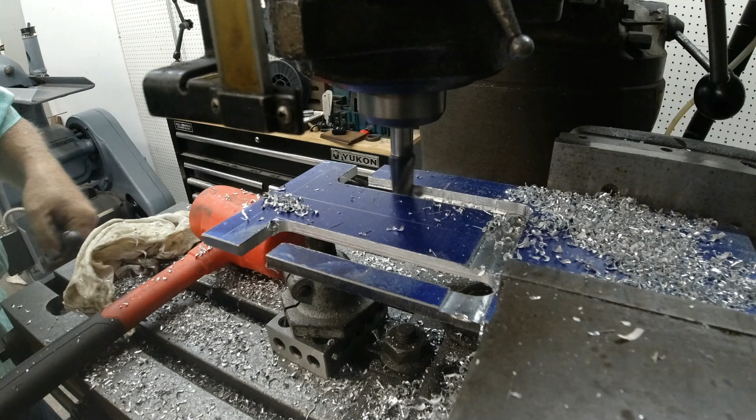Hi folks, today we're not in my shop, but we're in Don's shop. Don will be in a little while, he's doing something, didn't really want to know what he's doing, but he'll be by. Anyway, the reason I'm over here is because, as you know, we're rebuilding my Bridgeport, and I'm over here borrowing his Bridgeport, and getting to say hello to my baby over there.

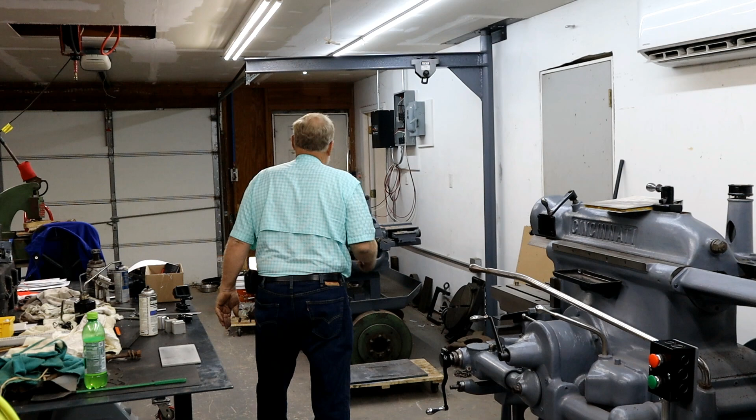Cincinnati's almost finished. Got to make the gibs for the head, and that's the last part. But everybody's been busy. Hi, baby.

He hasn't been waxing you, has he? Best slave I ever owned. Uh-oh, trouble has arrived.

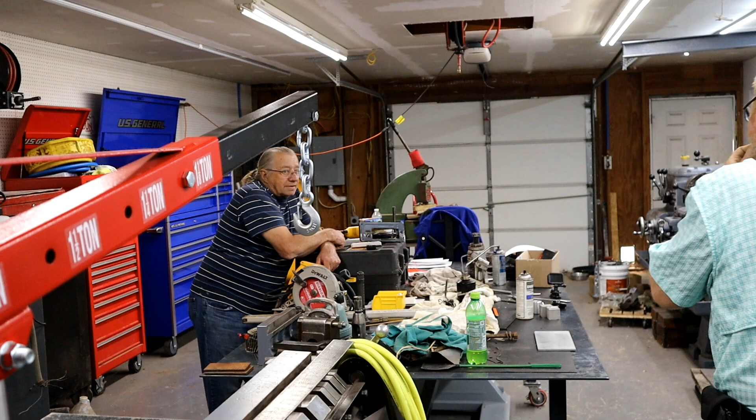You've been here. Hi, you're hiding. Don't hide. I'm not hiding, I'm working. Why are you working, huh? They pay me to work. Turn it down for you. Now they can hear you, they can't see you. They've been wondering where you are. I'm still here, he's hiding. All you ever do is work anymore. Hey, story of my life, it's what they pay me to do. Kind of feel obligated to do it, you know.

I noticed you haven't waxed baby in a long time. No, why haven't you waxed baby? I haven't done anything in a long time. I'm going to have to call the lathe police on you. Except build a wall, that damn near killed you. It did, I'm getting old. Well, we'll have to get you back in the swing of things. I don't think you understand what getting old means yet. You go from 'I'm feeling okay, pretty good for my age' to 'oh shit, man, I'm starting to feel old.' And it happens pretty quick.

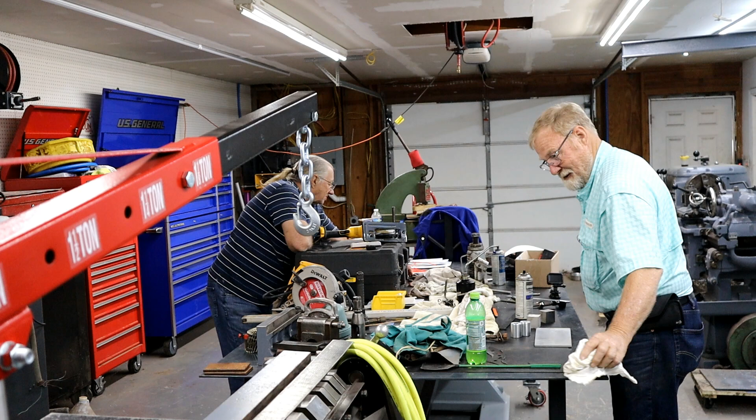It really does. I think you should borrow my membership card to the gym. I don't think that's what it is. Of course, I haven't used it in about a year and a half, so somebody needs to go use it. I mean, I'm pushing 73, I'm starting to get old, okay? You know, I know people in their 60s who can't walk. I know you were going to tell me, but it just depends. Everybody's different, I guess.

Well, I came to play with your tools today. Well, if you'd finish your mill, you wouldn't have to. I'm trying, I have to work too, you know. Well, not really, I don't have to, but I like to. Bullshit, mama makes you work. Mama does make... she says get out of here, so I have to go find something to do. Don't pay for your toys. Yep.

Well, I think I found everything. Where could I find a small machinist square? I mean, I know you think this is a small machinist square, but it's not. A larger one? Six inch? I don't have a six-inch one, got one that big. Okay, that's the biggest one I got. I'll take it. I thought you maybe have... I thought I had one bigger, but I don't know. What's that? You didn't wax this one either, you got to wax this thing. Okay, now that's better. He's over here looking in his stash.

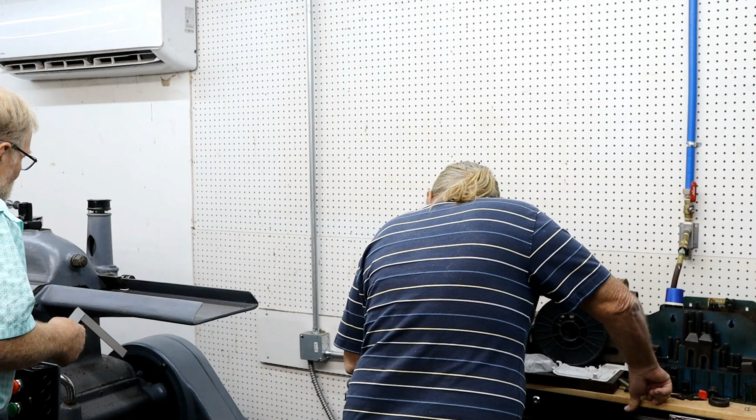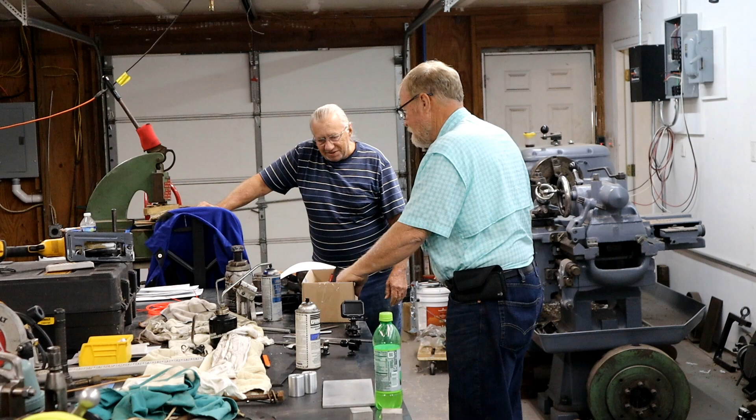All right. Well, I got to make some things, got to lay it out and take care of all of this goodies. Well, this is heck, I get you a microphone and then you walk around. Well, I've got to go back in the house because I'm still working. We'll just keep on to say hello to everybody. Now he's leaving. I got stuff I gotta go do, you know. Goodbye, I'll be back. I'll be here, we gotta finish this soon.

I need the gib from the shaper so I can finish putting that together. Well, the gib from the shaper's coming quick. You'll notice it's all back together now except the front end. Okay, well, we'll get it. Yeah, we'll get it sooner or later, no rush. Don't see why you need a shaper in the first place. Can't do anything eight foot long.

Okay, I'll bring you a little closer and show you what I'm doing. Shake you up real good.

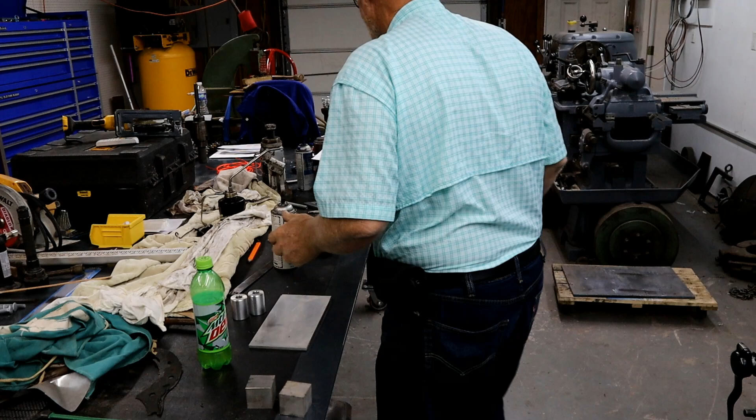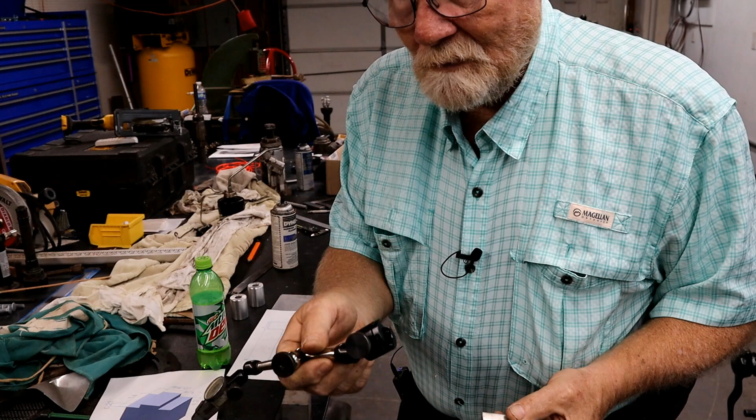Got two things to do today. One is to finish making this part, which is what I showed you in the last video, making this on Bob. Then I've got to make this part, which is going to be roughed out of these pieces of aluminum block, and will transform into the base for this little Noga style indicator holder that can be on the Kingway. So that's what I'm doing.

Also need to take and make this upper plate for the round part, and might as well make it here while I'm here.

That way I get to use his electricity and air conditioning. Don't tell him, don't you dare tell him. He'll charge me, he'll put a coin-operated box on there.

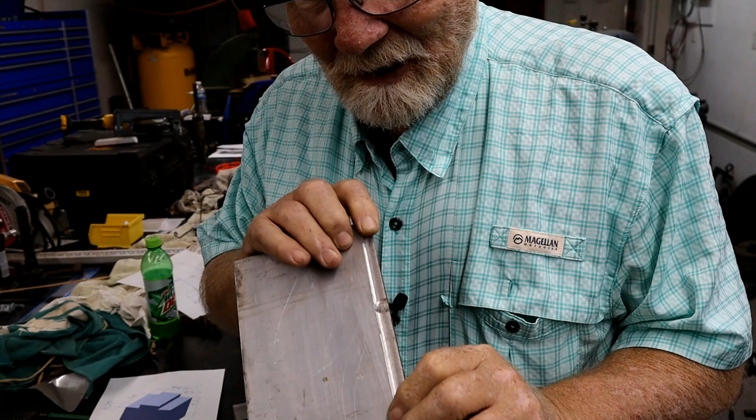I went and dug through my aluminum scrap pile, and even though this one's been cut on before, I've got just enough from this side to this side to make the width of this T-plate. It's 4.38, and I think that's right at 4.5. This is a 90-degree angle. That looks good on that side, and that looks good on this side.

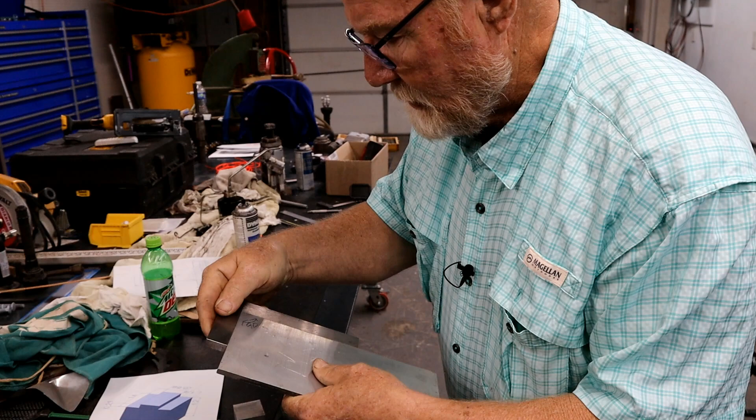But sometimes making sure the program works and all that takes longer than just putting it on a manual mill and getting after it. This is so simple. So we're going to square these up real quick, and then I'll lay them out using the old school method. And that's what I'm going to do with this plate right here. It's a simple plate, I just need to take care of it quickly. And in the old school days, we did this with a scribe and layout, and that's what I'm going to do.

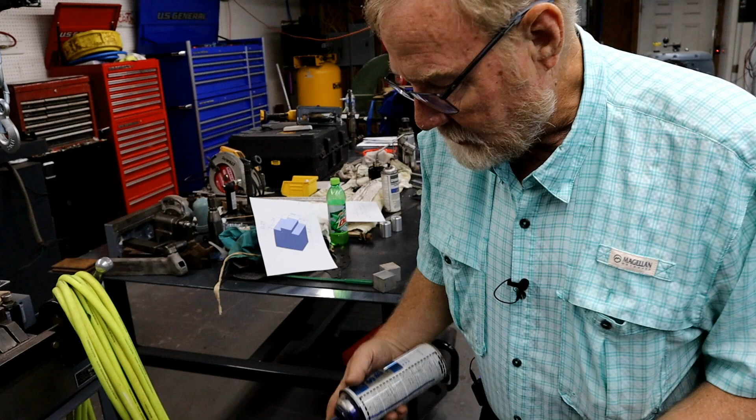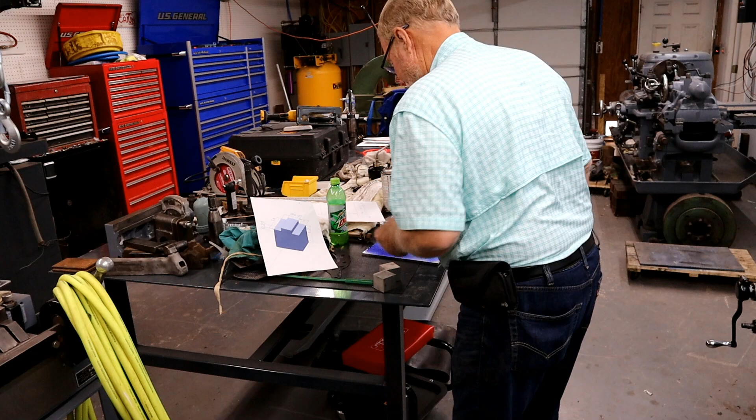This is blue layout ink. You don't have to have it, but it makes your lines stand out a lot better. And it makes your fingers blue too. And it dries very, very quickly. This can is so old it's not spraying very good, but it's just one I grabbed.

I'm going to take this and lay it out on the surface plate with a scribe. But first off, I got some rough edges on it that I need to take care of. So I'm going to borrow this little grinder over there. Well, it's a belt sander. Grind this off real quick.

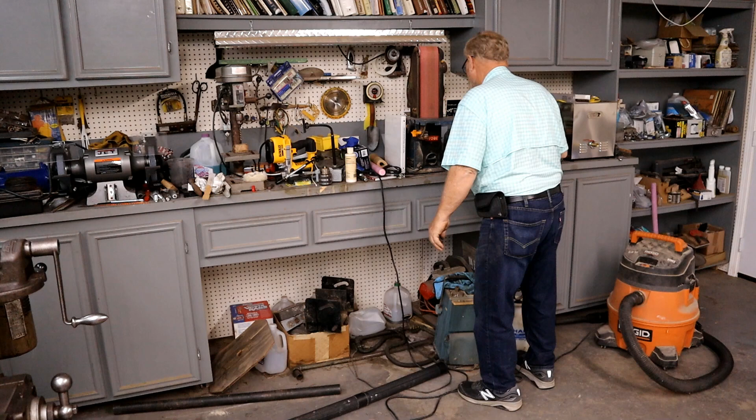Be damned, he put a coin operated- no, he didn't. I don't know how it worked.

Got my fingerprints on it. I just knocked these edges down to where they're not really rough. We'll use them as we lay it out. Let's go in there.

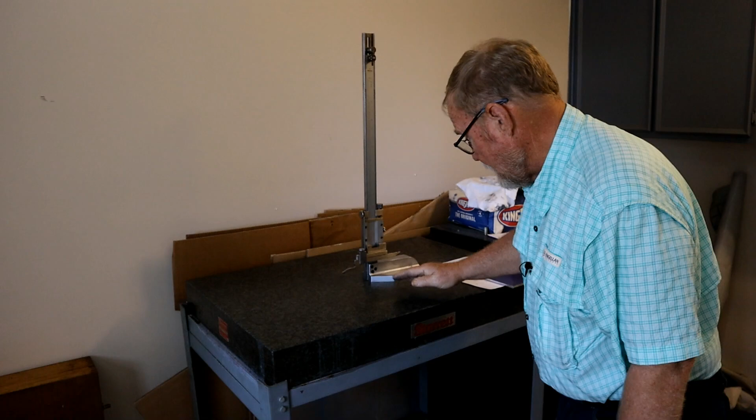Now I'm in a room in Don's shop that's kind of dark, and I didn't bring any accessory lighting today, so hopefully you can see this well enough. This is Don's granite surface table. It's a Starrett brand that he got, and I don't think we've ever had it tested, but for what I'm doing, it's plenty good.

Wipe it off with your hands so you make sure there's no grit on it before you start moving things around on it. Same way with your piece of material, wipe it all off. You can have these things resurfaced and checked. All the ones in my shop have been checked out and are certified again. This one we haven't ever had done, but it's a good plate on a good quality stand, so it should be good enough for most things. Just keep it that way by keeping your hands and everything clean.

Now, this height gauge is the way I used to do everything. It slides around on the granite surface plate, has a graduated scale that lets me easily measure things, and this has got a carbide scribe on the end of it so that I can make layout lines. And basically, this is what we're going to lay out right now.

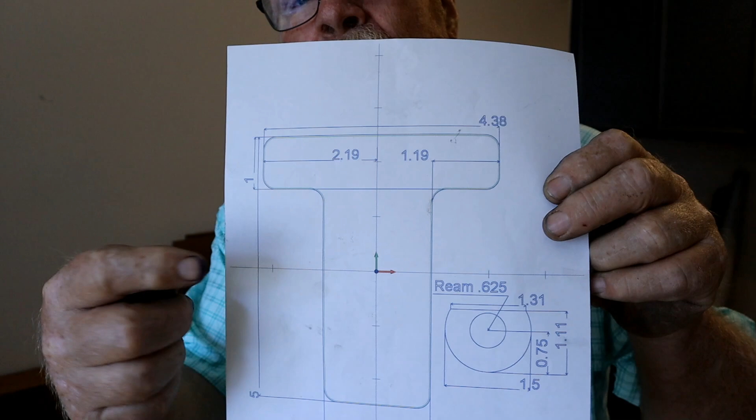This is not to scale, but I've got the dimensions on it. When I get back to the shop and I need to start laying out the holes for drilling it, I'll print out one that's 1-to-1 scale, and then that way I can just punch those holes and make it quick and easy. This is the plate that the leveling vials are going to attach to.

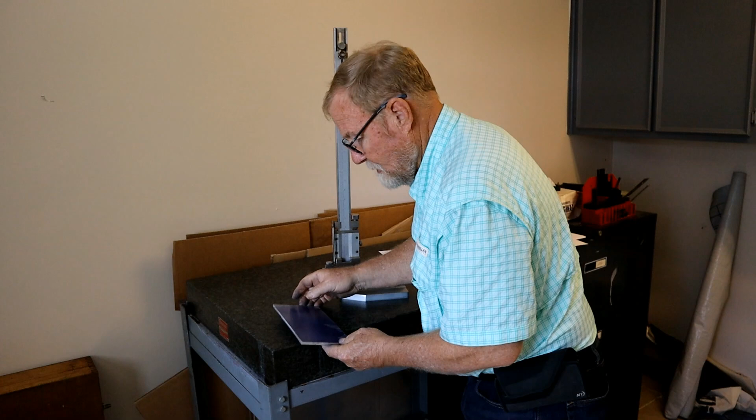Anyway, I measured it out and checked this corner on the square, and it's at 90 degrees. Unfortunately, I should have checked this side, because this side's got where it's been milled before. So let me go check this out and see if this is square.

Now I brought back some of the basic tools from the other part of the shop. If you don't have one of these, you can still do the layout lines. You just need like a carbide scribe. You can buy these at almost any hardware store, the little general tool section, they make these. Square, let's check this.

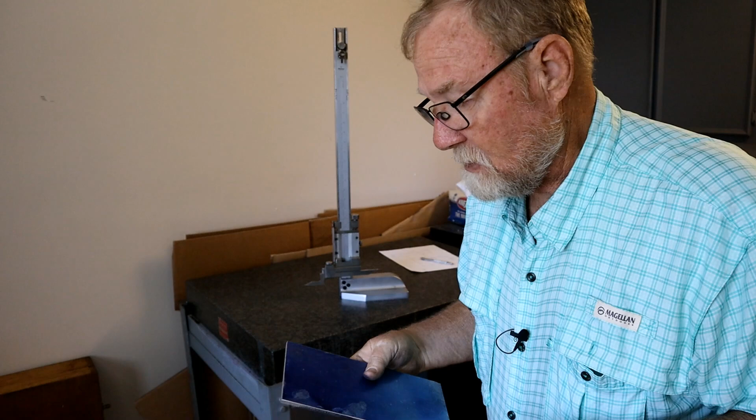Luckily, that side is perfectly square also, and that's not the side that's messed up, so I can use this side for my first reference point. Now, if it wasn't square, I could lay it out with this, cut it, and then go from there. But I'm already starting with two square edges.

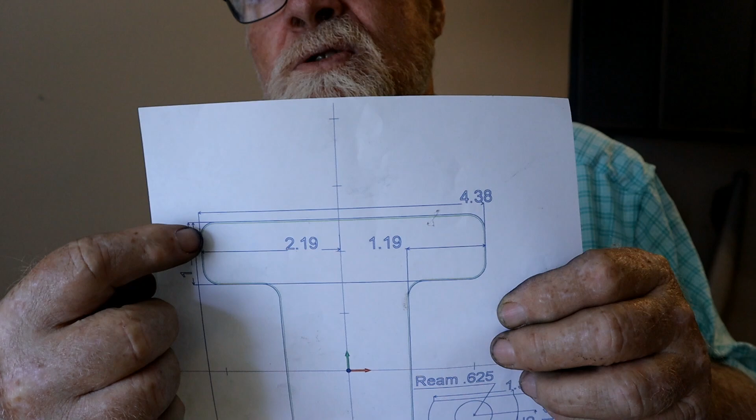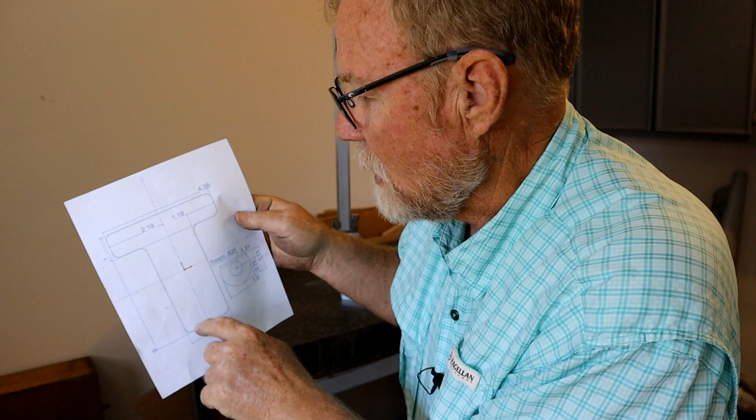Now, the one I have at home has a little magnifying glass that'll slip around and you can read it a lot easier, so I might have a problem with this one.

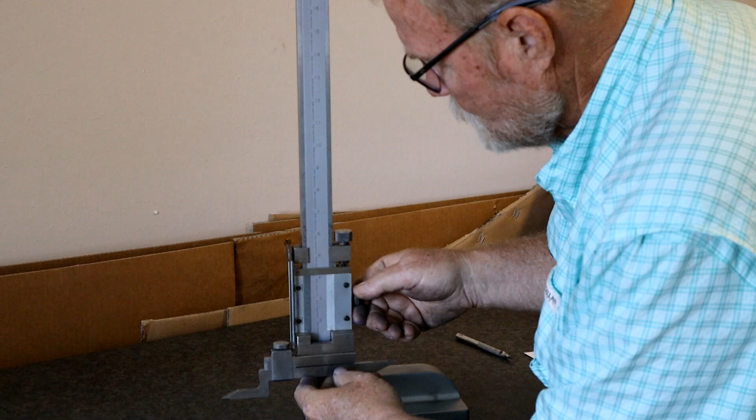First thing I'm going to do is loosen up this top. This is the fine adjustment. This one here locks the main body. Now this one locks the main body, and this one locks the fine adjustment portion of the machine. I can lock that there and unlock this, then use this knob to dial it in precisely.

First thing I'm going to do, since I've never used this, is check to make sure all this is tight. Then I'm going to lower this down onto the surface plate. I want to make sure that it's touching right there, which it is. And now I can use this part of the scale to raise it up and down to get it perfectly on zero.

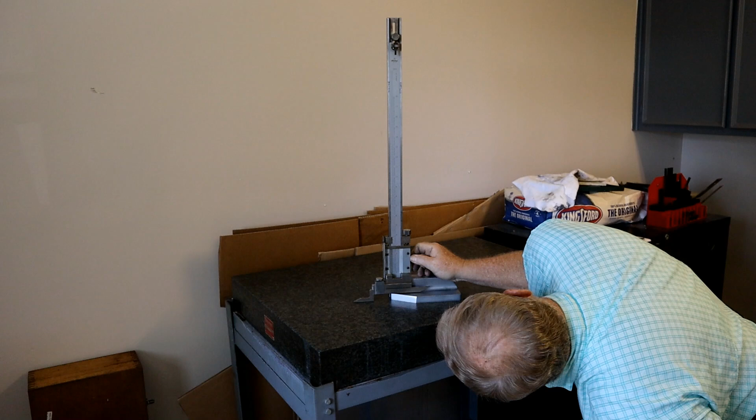I'm zeroing my height gauge. If I look down here, it is already perfectly zero. So great — now all I have to do is move it to the measurements I want to draw a scribe line on. Let's start with the first one.

We're going to go up to 5 inches. Now, I could sit and lock that right there and then use this scale to bring it up to exactly 5 inches.

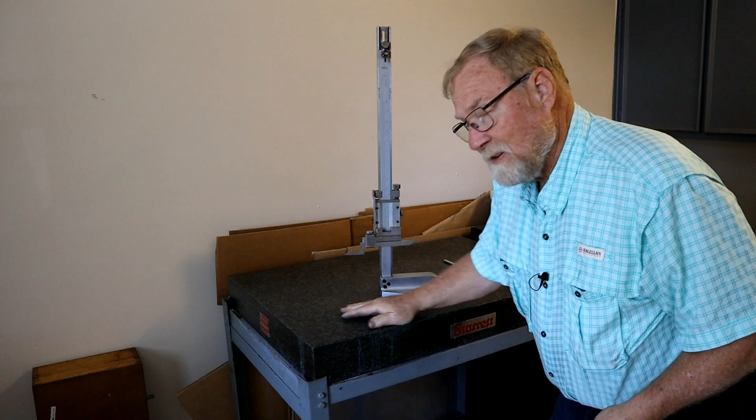And there we go. I don't think you guys could see that. I'm wearing my newfangled glasses and I can barely see it. These are some kind of progressive type lens. Haven't ever had to wear glasses for distance in my life. In the last 3 weeks I started, and it's a different way of living, I tell you that.

Your hand can feel so many things on there that's different. Okay, I know this is my 90-degree angle. I want to put it here, and then I just set my scribe like that and pull it across. I now have a scribe line at 5 inches.

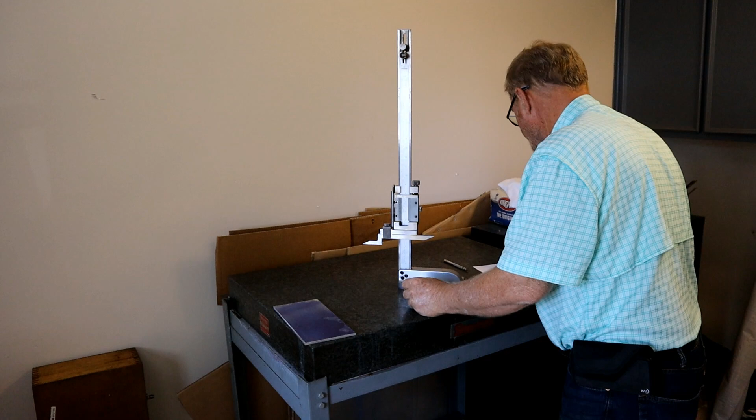I need one to be 4.38. I might just change that because 4.38 is kind of silly to have to measure out, so what I'm going to do is just go on up here to 4.4. Got it on 4 inches. There we go, got that locked in.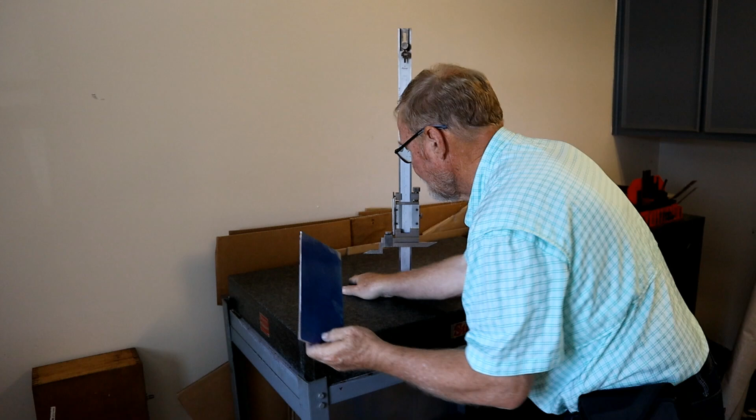This is my good surface here, this is the milled surface, so I want to cut all that off of this piece of scrap. So now I've got a 4.4 inch line — I made it 4.4 for now. I can mark a center line on this for lining up the screw holes by just going to 2.2, okay? 2.2, took all the math out of it.

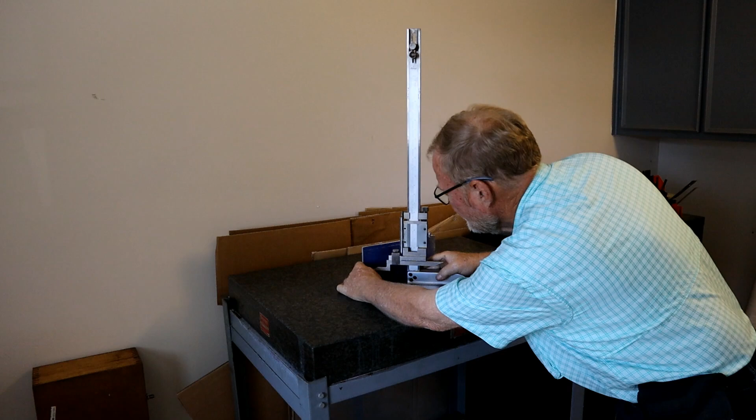So now I've got a center line, I've got a bottom cut line, I've got a top cut line, and I've got a piece that's 4.4 wide — halfway done.

So now we're going to work on the length measurement for this part right here. It is 1 inch exactly. So if I come up to 1/2 inch, I will have a center line for that piece, and then go to 1 inch, I'll have the bottom cut line. So let's go down here to, well, let's just do 1 inch while I'm there. That is 1 inch.

Now I need to go to 1/2 inch for the center line. I didn't make that 1 inch line all the way across because I've got other lines coming in intersecting it here, so I just stopped it a little bit early. This 1/2 inch one I'm going to go almost all the way with because that's going to be lining up my screws.

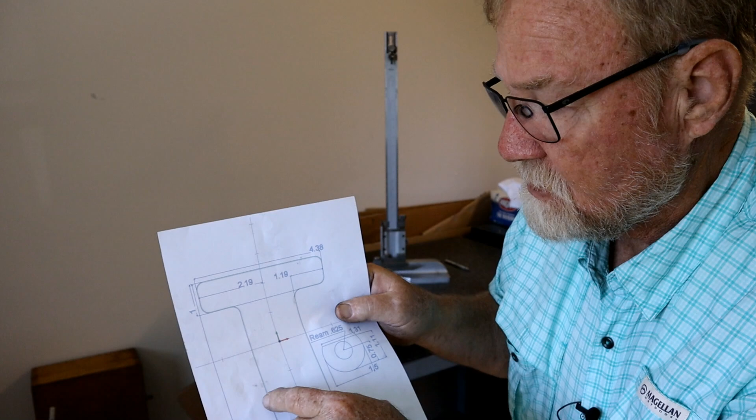We've got this top part lined out, so now I just need to do these 3 lines and I'll be finished. Now, this is 2 inches wide, this is 4.4 wide.

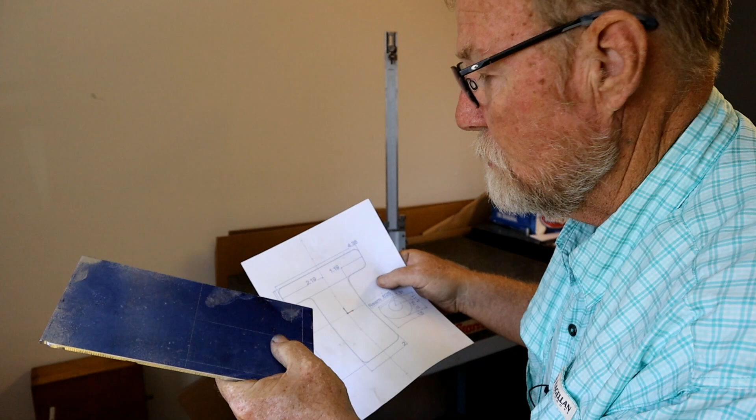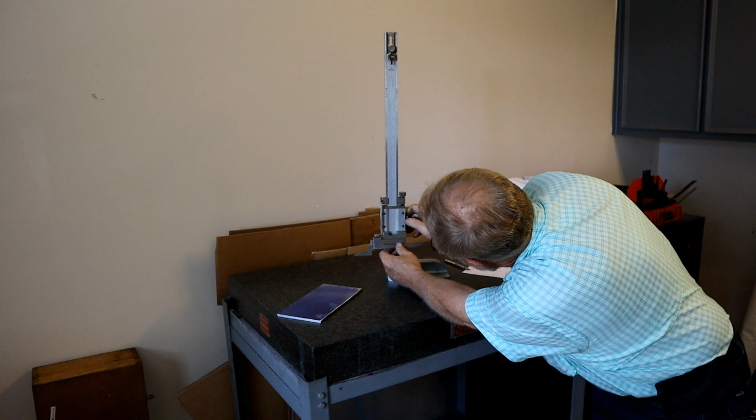I need to have a center line, which I've already got here, at 2.2, so I just need to add 1 inch above and below that line and I'm through. So 2.2 would be 3.2, which is there.

Start about right here, go all the way down. And then 1.2 would be the bottom one.

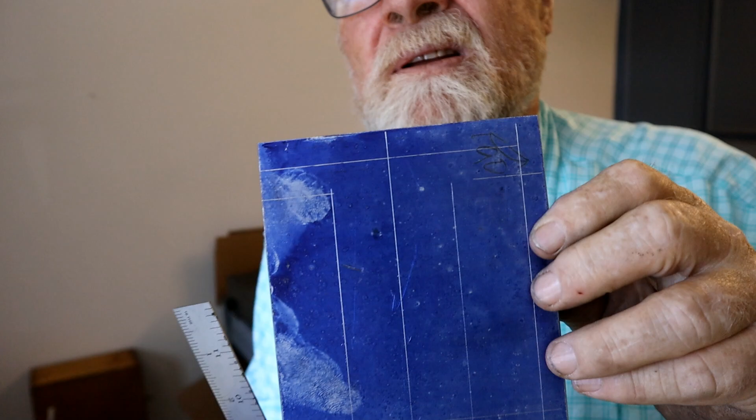So now I've got the top 3 parts and the bottom parts, and now I just need to verify my measurements. That's 2 inches wide. 1 inch wide, 1/2 inch on that center line, and this is 1 inch in the center. So we're done. Wasn't hard, was it?

Don's back. Tiny hinge pieces? Those little hinge pieces? I did. I'll show them in a minute. Just want to make sure you...

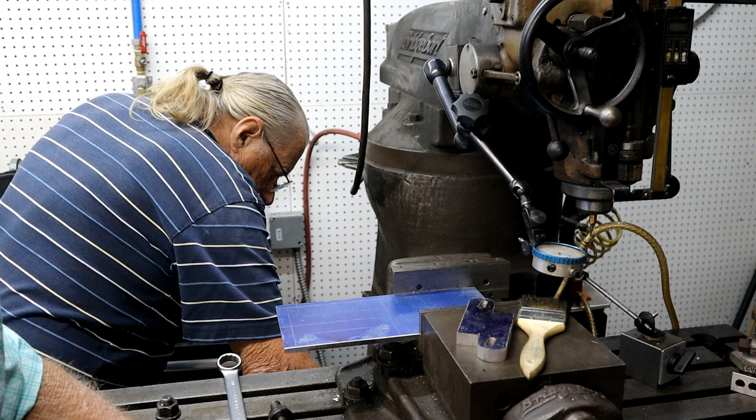Now, Don doesn't remember if this vise was set up to be exactly... It was at one time. It was at one time. That's the... we don't remember part of it. It's because you're getting old, remember? Yeah.

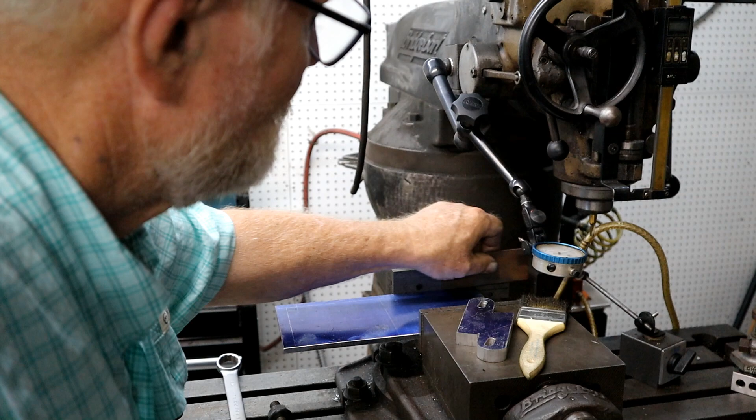And Don is still on a spending spree getting all kinds of tools for his shop. Oh no, you are too. I haven't bought anything in a long time. Every time I come over, you have to see something I've done and you want that too. I haven't bought anything in 6 months. Why? Don't need anything, that you know of.

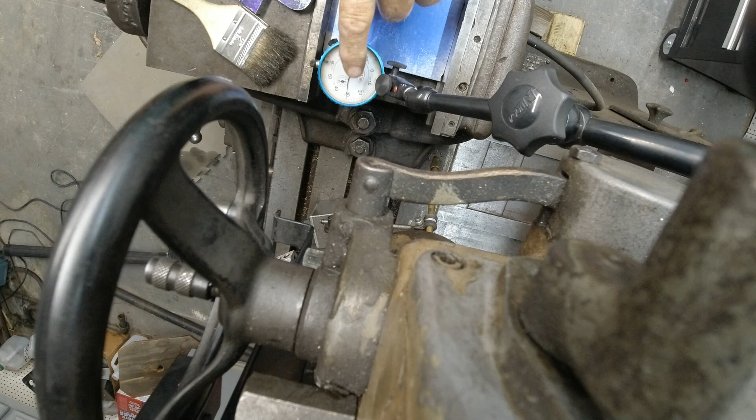So this is Don's indicator. I don't know, see my finger? How do you like Don's needle? Accelerated too fast, Don is so fast.

Why is this hard to move? Because it's worn out. It's worn out, and the gib is probably too tight? Too tight on one end and too loose on the other end.

Well, is it moving? Yeah, a lot. 2 thou. Every time I crank the handle, it's bouncing. Hold on, stop. I wonder why, you got a thou right there. Huh? There, half a thou? About here on the end, I got 10 thou.

We got to get this on the gauge, or we got to put this on something. I tell you what, it works better over here. I think it's fairly close, though. Well, fairly close. I'm going to square something off on, and right now it's gained 3 thou. 3 thou, 4 thou, huh, in 3 inches. So I'd say no.

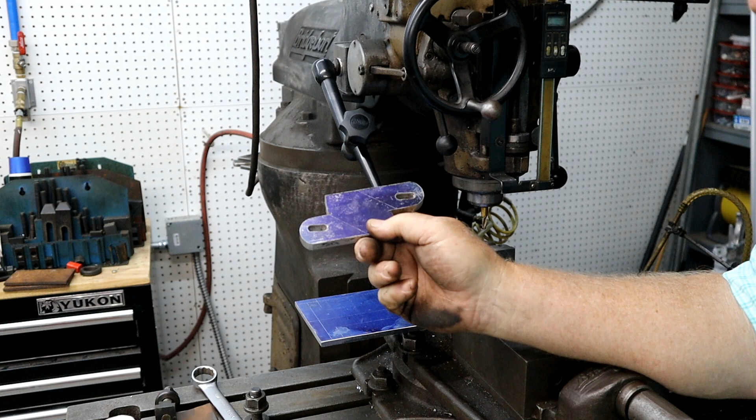There's a video I'll link to where it showed an utter fail of me trying to TIG weld that ladder bracket. So Don brought it over here, and we're making a new one.

And he put it on his vise. It needs to be cleaned up. Well, all, but it's really good for somebody that's never run mills before. I just eyeballed it. You eyeballed it. The angle. I matched the angle with the one you gave, the old piece.

Okay, well, see, that works fine. Was that the right size? And we left it in one piece so it's easy to work with and get these round corners on. So, is that the right size? Yes, this will work, sir.

Anyway, that's pretty good. We'll clean that up, and then I'll try to weld it again and see how bad I do. All right, we got it moved down a little bit to where it's in a freer range of travel.

Which probably means it wobbles more there. Let's see what we got. Now, see, it's pretty smooth right in here. It's loose enough to be smooth.

And actually, that's pretty close. Would you like to borrow my new glasses, Don? From here to here, though, it's pretty good. So we want to split the difference because it didn't move from here to here, and it started moving from there to there.

Okay, right here is at 38 thou on this dial. This is where we're watching, Don. I've taken and stoned that surface. 38.

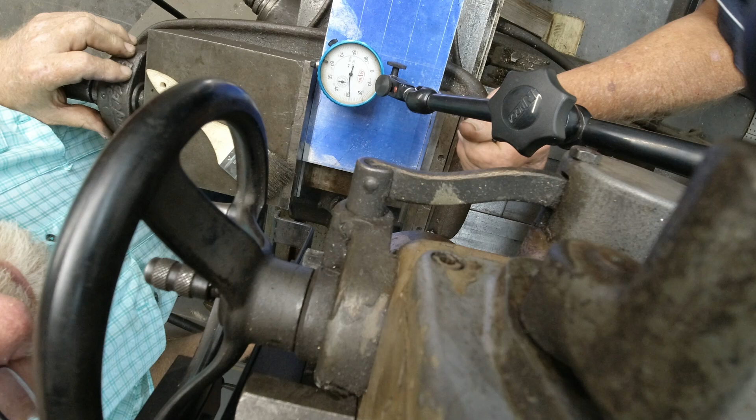That's pretty bad. 10 thou, 11 thou, 10 thou - it's 10 thou. That's pretty bad. So what should we do?

Split the difference with the vise, move it. And how much will that be? 5 thou. Very good, my God. My goodness, half of 10 is 5. That's - I'm a genius. No, you just went to school when we did. It made you use... you didn't have critical thinking. You didn't have to have a calculator to figure that one out.

Now I need a hammer. Tappy tap, I'll give it. I need a tappy tap. That's a bad hammer, no. You want the dead blow? I want a dead blow.

I'm trying to make this bounce all the way around. I grabbed the plunger here and pushed it in to see which way it needs to go. If I kick it this way, it'll make that plunger go farther in and high. Well, we don't want that, we want it to go the other way. So if I rotate it this way, it will make it.

You want to go 5, make it go 5 thou? I want to go - very good. Right there, that's good enough for right now. Try it now. Okay, just gonna try it. Lock it down.

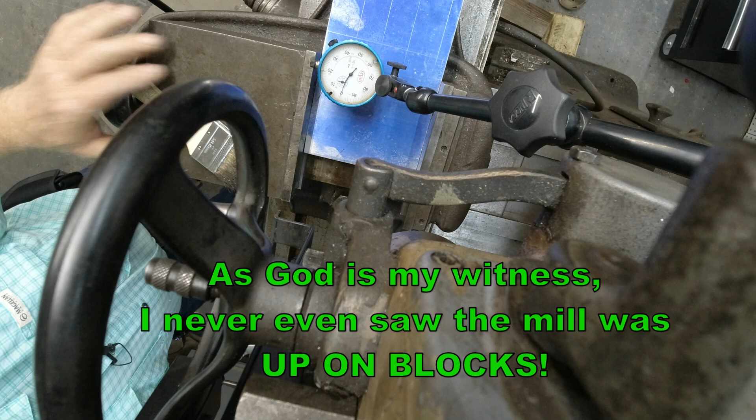Well, that could be attributed to the table. No, that's pretty good right there. Almost dead nuts on, except for that little spot right there on the deal. Why is it way at the end? Listen. It's not, doesn't move right there at all.

Considering that old beat up vise, it's probably about as good as you can get. It goes, drops off right at the end. This might be bad, this might be low, worn. I mean, it's good from here to here, and then it drops off right there.

Well, but you got to think here now - this is being told where to go by the lead screw, the nut, and the slop in the rails. Well, it could be a bad spot in the table, a worn spot. So if it gets into the - which really makes sense, because when you get there, where are you at? In the middle. Where do you use most of the back and forth? In the middle. So that's where it would be worn, so that makes sense. You're right.

Good God, I'm glad this doesn't have to be precision, because we ain't going to do it on that mill. The thing wore out. I know it's wore out.

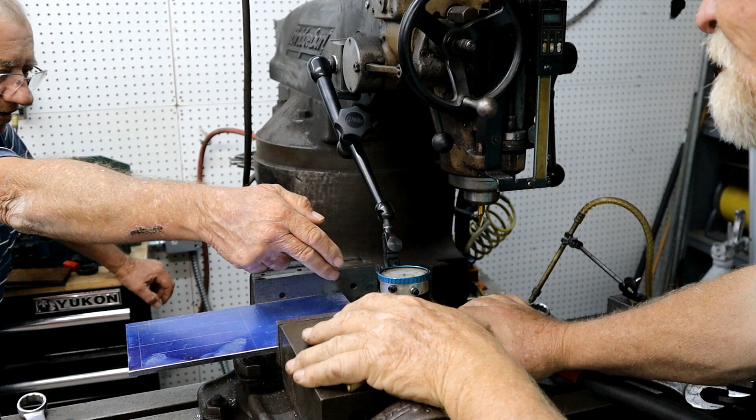Even I know that. Well, I'm going to try to get it as good as I can, and we're not going to worry about it. Well, you're doing it on this end anyway, and that's the end that's pretty good. So I think we're gonna be all right. Well, I might not be able to do it that way, because it gets so tight when I get out there.

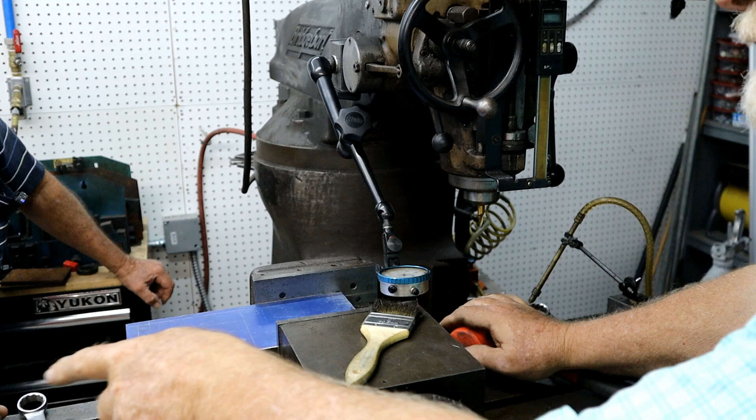What we were going to do was hang this over the edge and put a jack underneath it. And now we're going to go back. See if we go that way.

Let me see how tight it gets. It's still pretty loose here. Oh, it's real loose here, buddy. It's real loose. You have no problem here. Okay. No, but I got to get it all the way to here.

I know. We're still going. We're cutting. We're cutting. It's getting tighter. We're cutting, and that's all I have to go. Well, no, I have to go a little bit more. The power feed works okay. The power feed works okay.

Yeah, well, you can always move this a little more, right? I don't really honestly think it's going to matter that much. But if you move it further that way, it's just going to be worse. I think you can cut it. How you just cutting? That's not precision anyway.

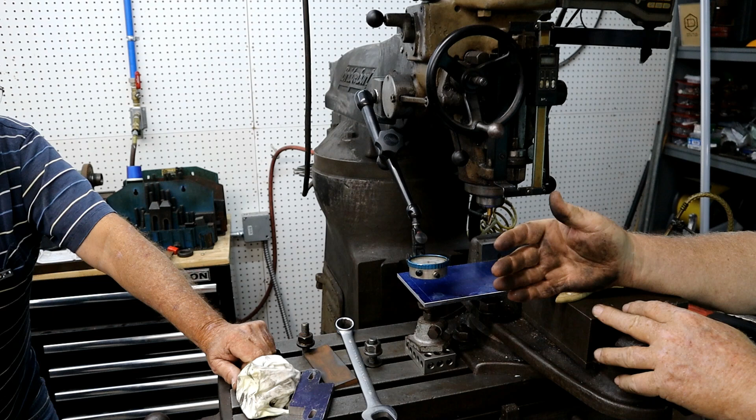It's just a T. Well, there's another way we could do this. You know, I've been working with old machines my whole life. Turn the vise this way. Go back and forth. No.

But the bed's worn, probably going this way as you're going, so that would affect the accuracy of this cut. But it's probably not going to change so much drastically if you flip this onto its edge. So if I were to take and cut that out with a saw, flip this on this side, I could then mill with the bottom of the cutter and get a nice finish there.

Now, what are you talking about, a couple of thou? That's just a bracket that doesn't go in anything. I know, I'm not worried about that. It was the next blocks I'm going to square up. Oh, okay, this couple thou doesn't matter. And we just leave it like that and cut it. It's the other ones that we need to worry about, which the way this video is going, it'll probably be next month before we get to it.

I would cut this out as is. I'd say it's good. Roll it and go, because it's just a bracket that doesn't matter anyway. And in a couple of thou, you can't even see that with your eye. Probably not.

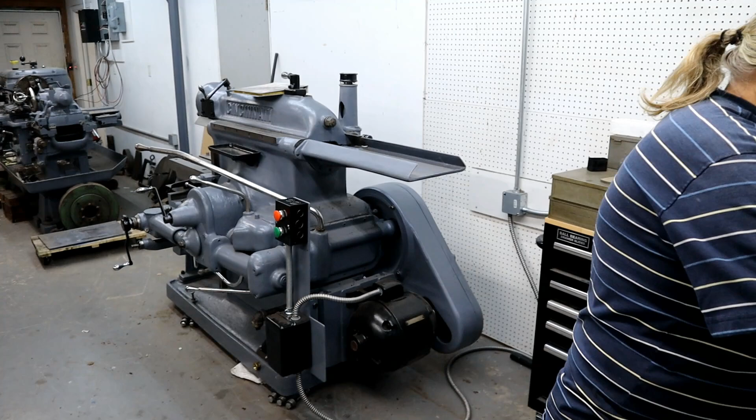We're going to think about this for a while. Let's talk about if you support this, it should be okay, huh? Can't go nowhere that way, and you're only kind of worried about going that way. And if you put this up there, you can't go that way.

I don't see nothing wrong with that. Just take light cuts, and you'll be all right. Yeah, I would think. Of course, what do I know? But I would think. I don't know if this works.

Go up enough. Yeah, it does. I'd say that's pretty firm enough to go this way with it, you know? You're not pressing down, you're just going this way and that way, right? As long as it doesn't loosen up here, that's what's keeping it this way. I would think that's okay.

We can give it a shot. Yeah, we can make this a what-not-to-do video. Okay, yeah, you can always get another piece of aluminum, worst case. But I think it's okay. We can be fine for that. Okay, let's get set up.

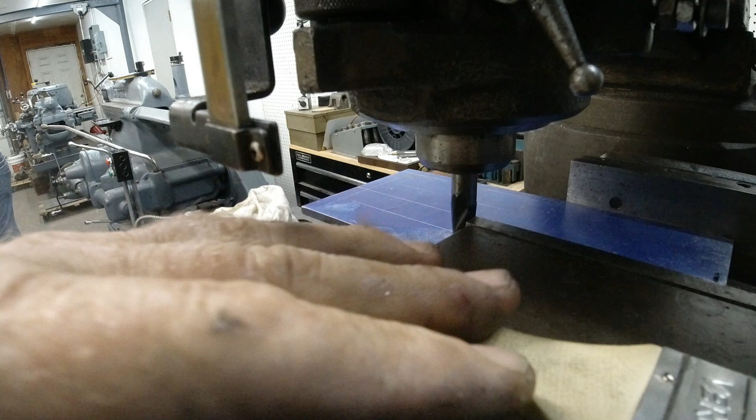Well, that ought to be a picture and a half. Clear everything off. See if it's reasonably flat.

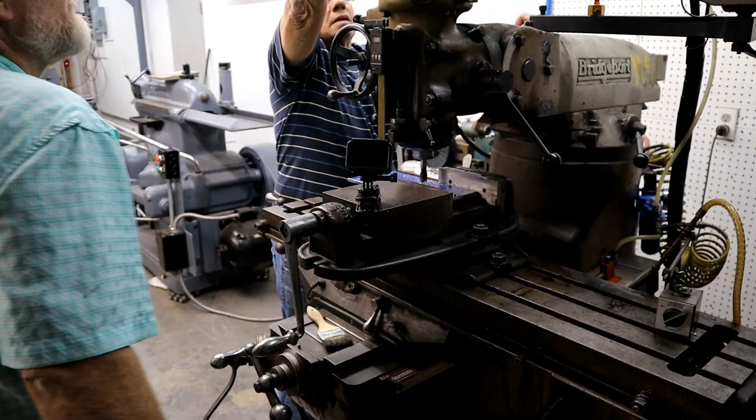So what speed is that belt on? Do you have any clue? That's on pretty low, that's on the top. So if we pull this lever here - we had one of these in school. That's the brake. Alright, yeah, you have to - it's that lever on the other side. My friend Joe Deaver was my high school shop teacher. There you go.

I'm not touching anything. I'm gonna get on that one first. Yeah, let's go there, down one. You go down one on your side on the back. I'm down, okay right there. Tighten it up.

There you go, still loose. Why is it loose? Even though I tighten it, it's still loose. Oh, I haven't done this kind of thing before - you have to push it back, then tighten it. Let's see if that works.

He didn't mean to run you over. Like a bull in a machine shop, huh? See if it works, or if it slips. A lot faster.

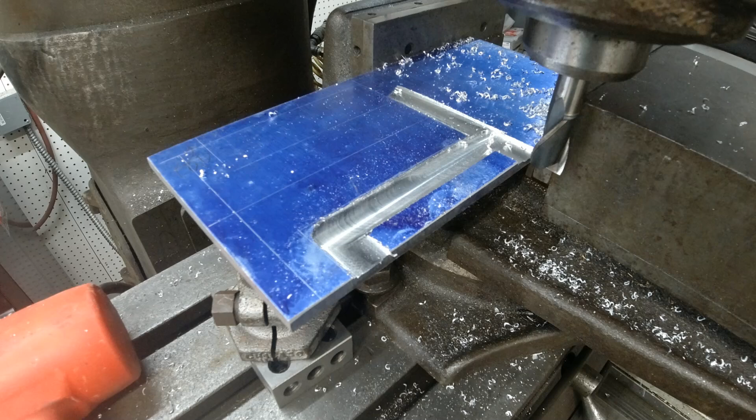When you're sitting here thinking about this, I'm cutting away half of my support on this thing. Yeah, true, that's why I didn't know why you went all the way out, but I guess. Well, I was trying to make it easier on myself instead of just milling in on one side, you know. So what I think I'll do is - well, you can always do the edges and then turn around and do this part here. Just trying to do it in one direction, but that doesn't seem like a great idea if I'm cutting off half my support.

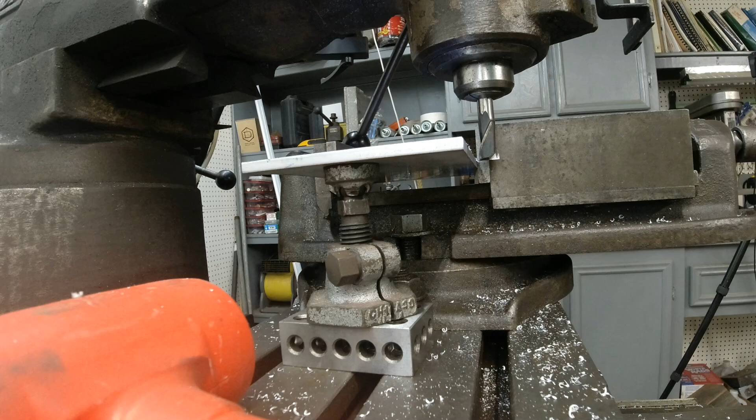There you are. So let's not do that. We'll leave this section here and we'll just come back here. That would leave support here for this little piece. Well, it's not going to matter because once you cut through this, that's not going to be supporting anything anyway. It's better than nothing, sir. Nothing's what I got now.

I do have a DRO. I don't need the DRO because I'm using my lines. I'm cutting away from the line, so my last pass will clean it all up. Just to start it, you could get it back to the same exact spot to start it.

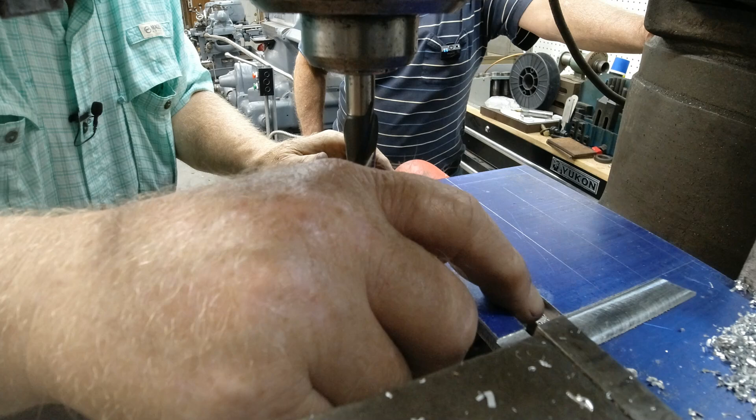All right, we took that out of there. Nice surface there, right on my lines.

I gotta go check my email. You ever check your email? It's right there, okay.

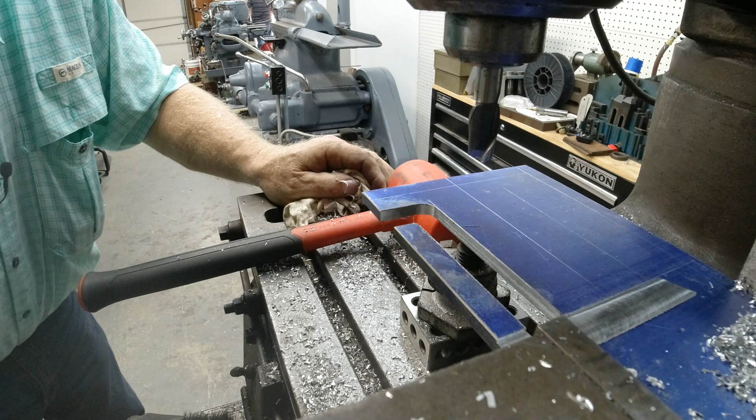So let's switch over to the other side. Now this side I got to cut off over here down to that line.

And I could take it out and get rid of the waste by using a saw, but I think I'm just going to leave it on there. That kind of steadied all that out right here, this side. So if I leave that part on most of it and just clean this part off, that'll leave it even more strength on that side. So instead of cutting all that off, I'm just going to cut this part first because it's the farthest away from my vise - it's still pretty steady on this jack.

And then we'll come in and we'll cut this way. Clean that out, I think that's going to look all right. Just taking light cuts because it's sticking out here hanging off a jack.

See where we can go from here. What the? Oh, you poor Bridgeport.

Now, one of the reasons I grabbed this one is because it's a center cutting bit, and you can drill a hole with it if you need to.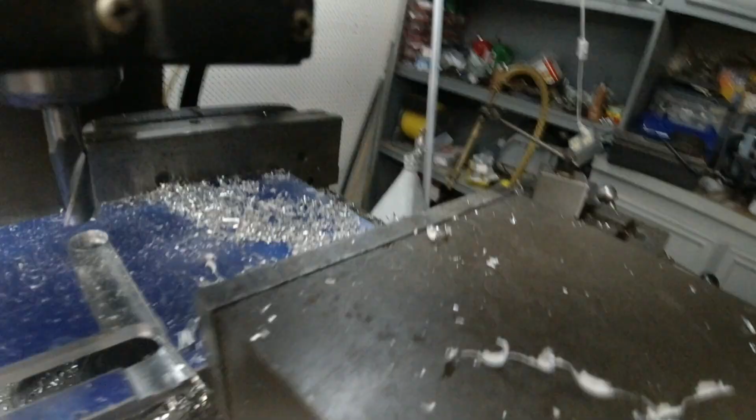Well, I gave it some oil. I don't know if it got to the knee, but it got over there coming out on the table. We got to rebuild this.

Anyway, I used that center cutter to drill me a hole for a little clearance. Chips and things can go down and I can see what I'm doing a little bit easier. And it gives me a nice starting spot.

Now I'm going to come over here and I'm going to get not all the way to my line. I'm going to leave the line for the last final cleanup like this. So I want to be sure where I am. Come off that line first.

I'll cut to the line. I don't know if you got all that, but there's the finished cut on this side.

By cutting it the way I did, I directed all the force towards this. I wasn't really worried about climb cutting so much, or which direction to travel that way. I was worried more about the force I was exerting. If I'd come this way, I'd be pushing away. This way, I was at least pushing towards the vise, and it's the correct direction - got a nice smooth cut there.

So now all we need to do is come over here. Let's get it. God, you poor thing.

Lining up good there, and you guys are getting blocked.

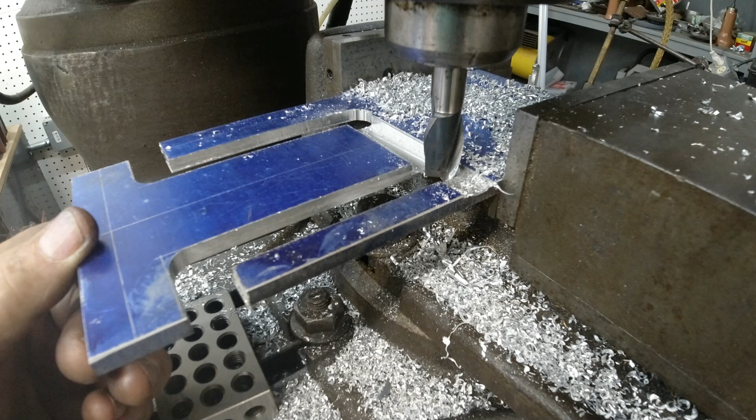Enough of that. As you can see, I'm down here to the last 32nd of an inch. If I was younger and in a hurry, I'd already cut through that sucker. But I've put in a lot of work on this, and I know as soon as I'm going to cut that, the pressure from this pushing up could let it go into it. See how it's no pressure at all? That can flex, and that bit can grab it and throw it at me. You could get hurt really bad by cutting through that, so I'm not going to do it.

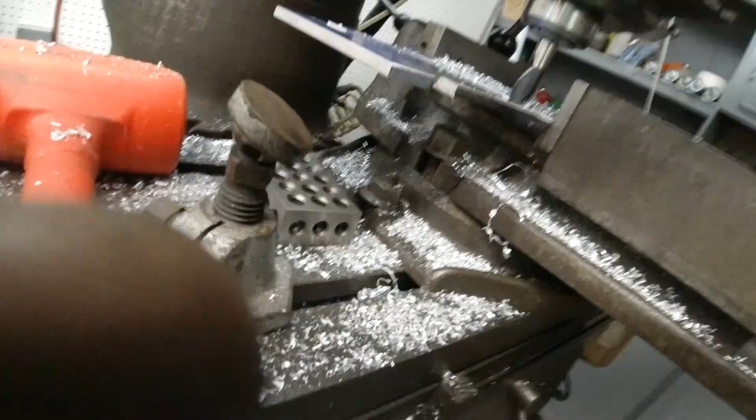I'll show you what I'm going to do. As I was saying on the little camera, I didn't cut that last little bit.

We'll ask Don, who's now returning. Is he returning with the microphone on? You get her done? Well, what do you think? Yeah, got her done. Still got a little lip.

You know, you could cut that with your bandsaw if you had to. Well, that's why I did - I took and I stopped, only because that was going to get thrown off of there. Yeah, and so I can cut that and take a file and file it up. And it's just a lot safer.

I'm going to - it's pretty thin. I've got to round these corners off once I get a radius gauge. And I think that'll look okay.

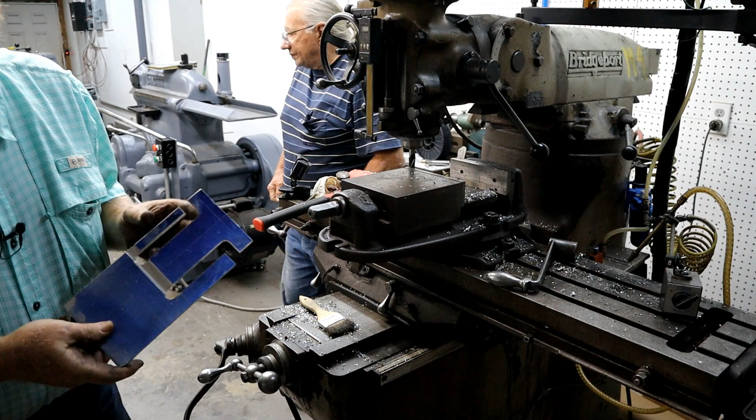We'll cut it off. You have anything here, or should I take it home? I'll take it home. You'd probably charge me extra if I did it here. What? Cutting it off. Oh yeah, so much more.

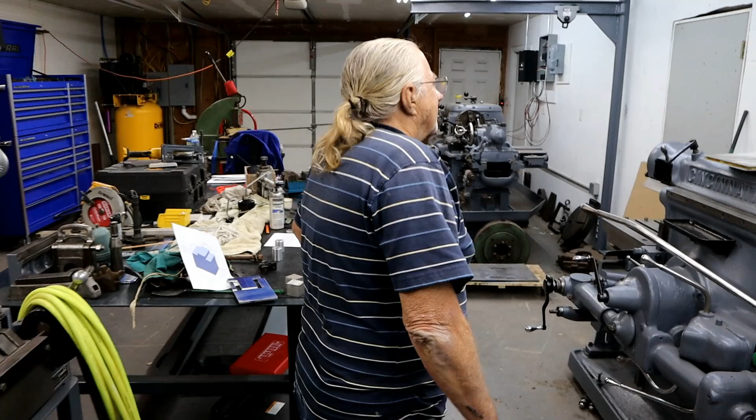I'm sweating, Don. You sweating? This is really the nicest day we've had since May, and I'm sweating. I can't help that. Sounds like a personal issue. Well, it is. Of course it is.

So you're gonna do the flat spots, or you're not sure?

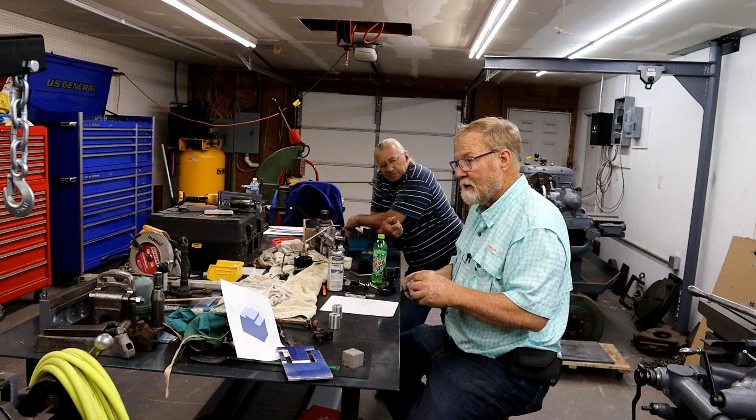The next project is this, and I was going to show people how I square up a block - but not on that mill. I cut this out of square stock in the first place. That should be close. So now I just have to finish the ends and basically bring it down to size.

So I know where that is, and it's good enough for that. That's just your holder for your indicator, right? It's just the holder that goes on the indicator, but if I don't do it right, I'll know it. You'll sit there and pick it up every time, and you'll go, if I'd spent another hour, I would have had it perfect.

But in this case, I'm only going to make one of them and save that stock there for the next one when I get the Bridgeport rebuilt, and then I can make it super perfect. There you go. Or not - depends on if you live that long.

Now, I've found sometimes that once you build something and it works, you never get back to it, you know. It's fairly straight. Man, my saw cuts good when I played with it for 4 hours.

It's already fairly square. That's off a little bit - one square. It's pretty good for a bandsaw. I think you did pretty good there.